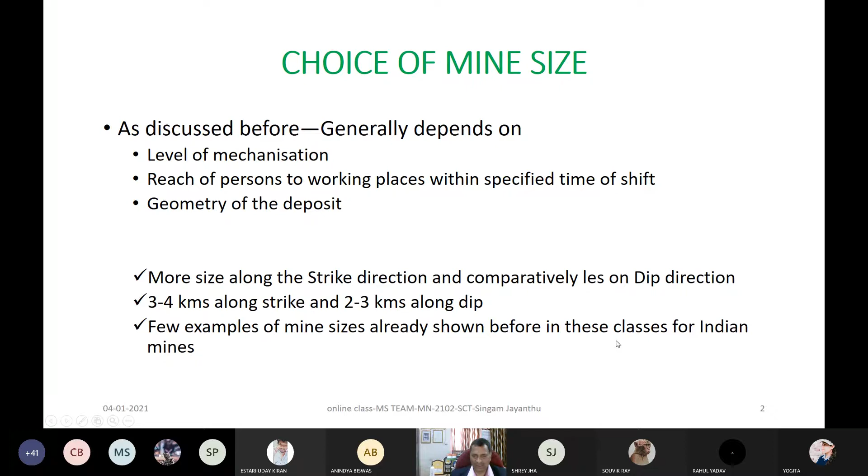Already I told you 3-4 kilometers along the strike and 2-3 kilometers along the dip. And a few examples of mine sizes were already shown before in this class. You understood it nicely. And again, I am taking you, my beloved students.

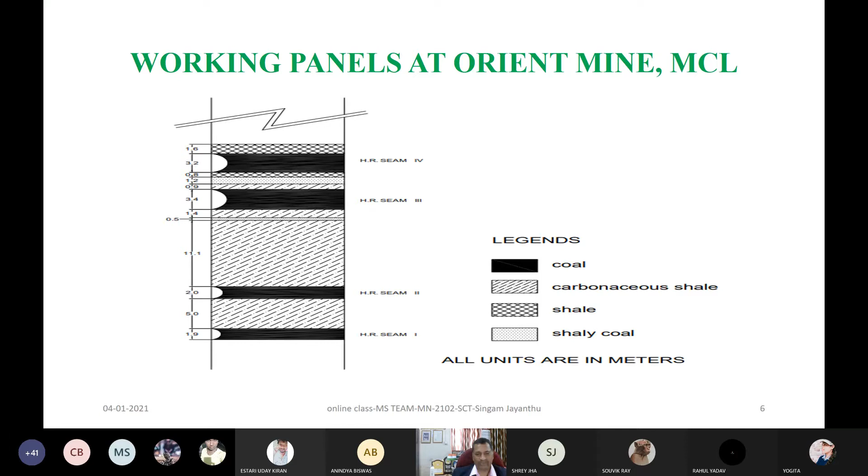It is not cost of production, it is a loss of 1000 rupees per ton in this COVID-19 period. Otherwise, even more, even less, maybe 500 rupees per ton, right? So these are the situations which, as an underground mine engineer, you should understand. And some working panel I am showing you here, with whatever LHDs they are having. Now you can see their mine condition.

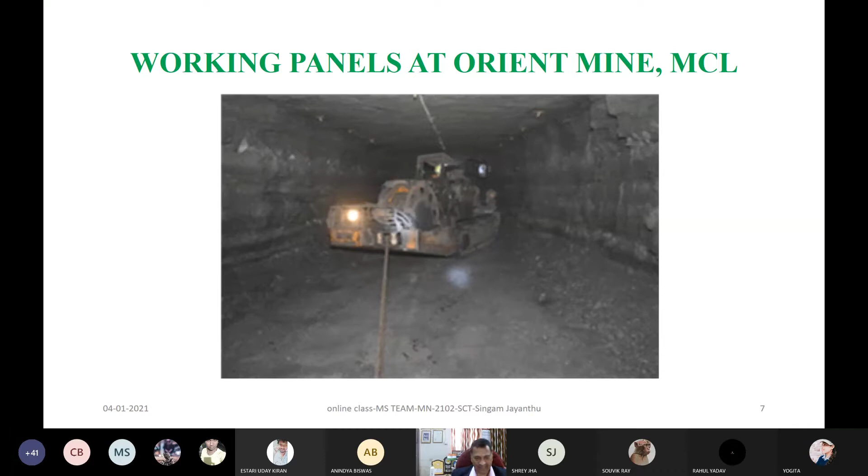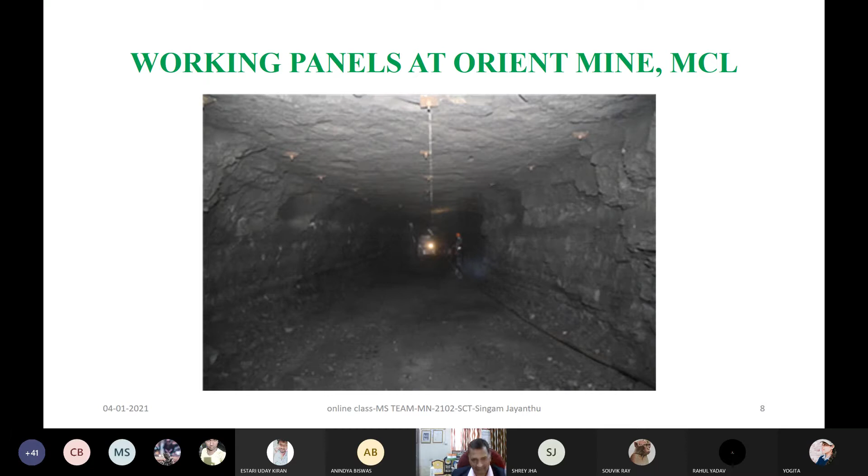This is not an old picture, just taken recently by our beloved Abhilash and others who are strata control engineers there, and our PhD scholars, MTech scholars in that mine. Now this is that mine, so that you will think that you are inside the mine, inside our mother earth, comfortably in this COVID-19 as well as your very cool winter season. You go here, it will be very hot. Feel that hotness, my beloved students. Then we will discuss more. Heated discussions we will have, so that we will understand better and make ourselves more useful for our Indian coal mining scenario.

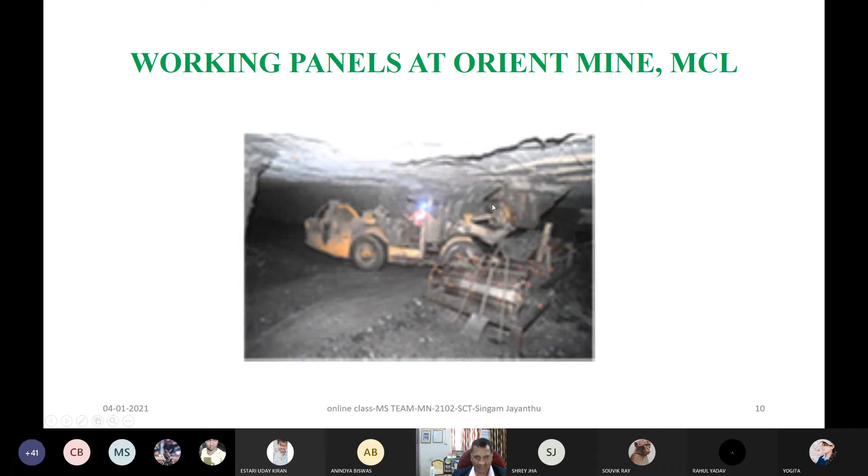Now you see how the LHD is being used there, right? And then transporting through loading onto the belt conveyors, how it is appearing, so that you feel that you are there for further discussions, my beloved students. Now this is that plan, a close view of that mine, and now you can see its total boundary, right? And you can understand by seeing this, my beloved students.

It is not a seam simply 1 in 8 or 1 in 7 throughout the deposit. It is not like that. It can be a part of a basin deposit, a basin something like this. You can understand a basin your mother used to prepare chicken biryani, vegetable biryani, whatever, right? Something like this. That is a coal seam, that part of it. So that's why sometimes you have to change the orientation to maintain the gradient of the workings. This is that mine.

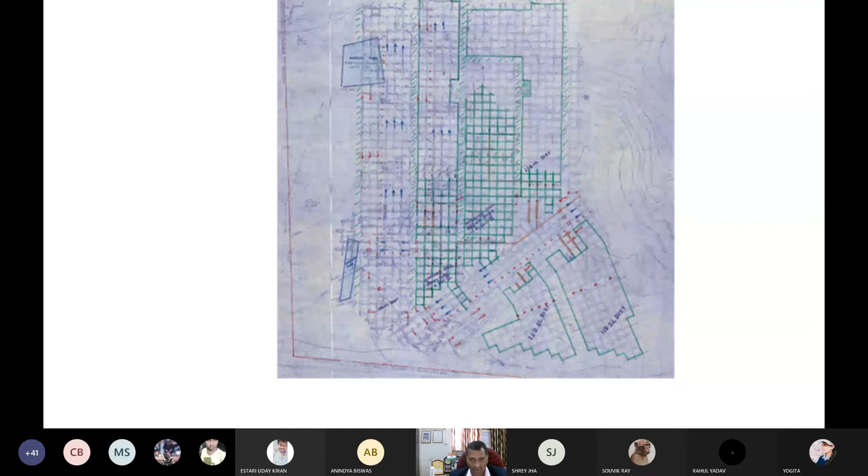Now you can see where they entered, and then development, so many things, right? Depending on the structure of that basin and other things, they decide how to develop and how to orient that mine. And this orient and that orient is different, but the mine name fortunately is also Orient mine, and you have to orient your galleries in the way that favors your mechanization or your working, right? That can be sometimes in the apparent dip, not maybe in the full dip. This is how these plans appear.

And here a very pathetic situation, my beloved students. This map is not at all digitized till now. I am very sorry to say, but you should know the fact. We are there in digital India, skill India, NEP 2020 new education policy and so many things. But still, this could not be digitized, and that is where your contribution should be.

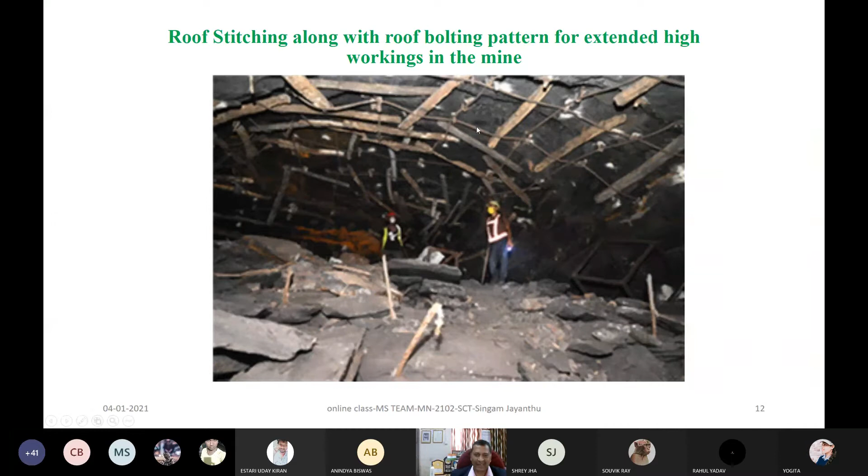And here, this is a recent photo again, where the galleries extended in the roof walls, and how it is being supported. You feel as if you are there in the roof wall area, like an assistant manager when you join, right? Either Yogita madam, Jasmine madam, you will be having the same dress, don't worry. With all masks, you are able to see. It can be a Karthik, many names I could not remember. When you summarize, when you give answers, I may refer to some more names.

Next, now you see how beautiful it is looking. So there are multiple sections. This is another section. This is a bottom section. In between there is a parting, my beloved students. There can be coal, where a thick seam is extracted in multiple sections, developed first in multiple sections. And because of some failures, there is some additional support, that's what I have written here: roof stitching along with roof bolting pattern for extended height workings in the mine, and how it is done.

You can see here, my beloved students, where this parting collapsed, where this is something like a double-decker bus, right?

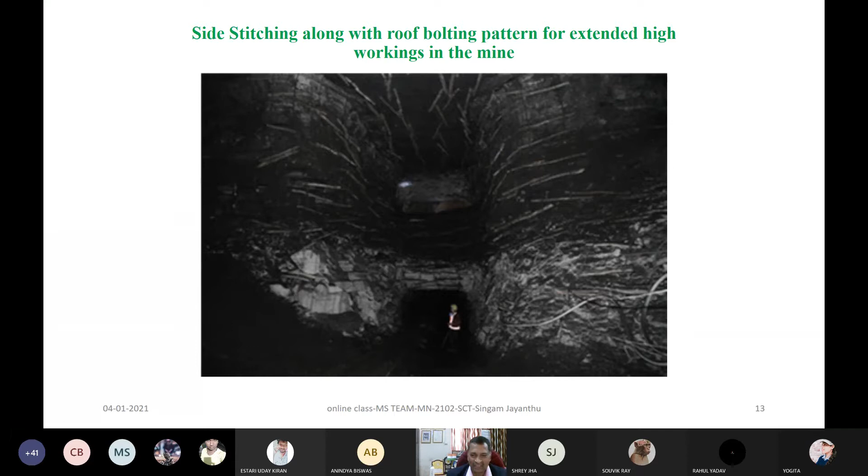Now double-deckers are coming even in Hyderabad, because I was hearing some voice of some student; for the pleasure of others, he can tell where he was talking to his mother, helping him. I like it because I used to help my mother in cutting the onions and all, and father in polishing his shoes and other things while going to his office, right, or working.

Now, details of working panels at Orient Mine. You just note down, because since I'm talking about mine size, and after mine size we are coming to selection of the method, that is important. And why I'm talking about selection of the method here is, now we have to change the method of mining in this mine to make it more profitable and at least come out of the losses of the mine. And that's where our contribution as NIT Rourkela comes, being in the same state, and we are near the mines.

And my beloved students, you should remind me, I will be taking you personally after this COVID-19 period to that mine. Whatever places I have shown you in those photographs, I will take you to those places, depending again on your interest, my beloved students, right?

Yes. Acha, any queries? You can unmute and ask me if you have any queries, my beloved students. Any queries? Yes. Let me know if you have any queries. Let me take attendance once again.

Shubham, you have any query? I like his nice profile pic with a very good dog. What is his name? No, sir. No question. What is the name of this dog you are maintaining nicely? Sir, his name is Rocky. Rocky. I thought it is Ramu, but something matching, Rocky, right? RR. Because I used to have a dog in my childhood, because I came from a village area adjacent to the mines, and I visited an underground mine in my 5th class and decided to contribute something to mining. That's the background. So this dog is appearing like that, but that dog is no more. Okay, that was Ramu.

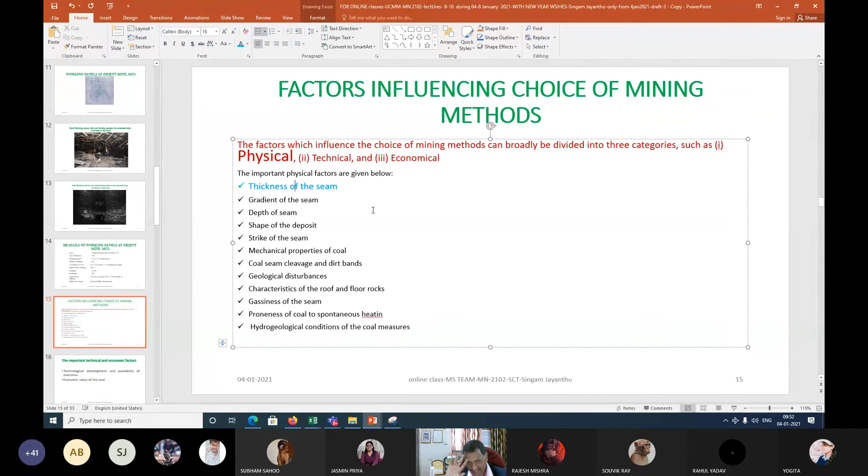They nicely said. But don't get a wrong impression that our Japanese are shorter, that's why their seam is also shorter to call a thick seam. There may be so many reasons for that. But nicely said by our Rajesh. So more than 2.2 meter thickness is called a thick seam in Japan. For us, more than 4.5, 4.8 like that. Poland, Canada different, 4.8, 3.5 in US and Australia, depending on the availability of thick seams and conventional methods.

In simple layman's language, if it is a thick seam, then we are going for blasting gallery methods. You note down the names: GDK11, GDK10, 21 incline, VK7, different mines even in Singareni. And Chora Gallery, East Katras failure cases in BCCL, ECL, where in thick seams blasting gallery is used.

Multiple seams, then integral caving, sublevel caving, or multi-seam workings with stowing. So many things we have done, right? But now gradient of the seam, like that there are different factors. Let us go with simple factors today, right? Gradient of the seam, right? So now this is also very simple because you are very much interested in pink color. Let me show it in that way.

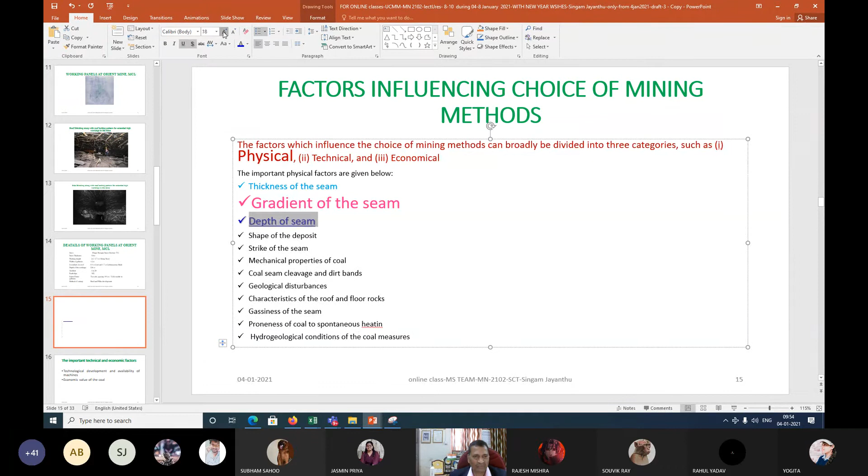Now, depth of the seam, very simple to understand, my beloved students. When depth is so much, what do you do? This is very simple and very easy to understand, right? Now, there will be a lot of load from the surface. I kept this for better understanding. This depth doesn't mean from the flat ground. It can be under the hills like this, right? There is a hill. Some place it is 500 meters, 400, and some other place a valley here, depth is only 200 meters. There can be so many things.

And even 1 kilometer, 1.5 also we went. And now choice of the method, you know very well, right? You cannot go board and pillar beyond 200 like that. Only longwall. Otherwise, some other methods.

Now, coming to the shape of the deposit, right? So now you know very well what happens if the deposit shape is not uniform. That shape can be undulating, something like a basin structure, right? And because of so much faulting, then this is thrown down, that shape itself is changed. Now I cannot even have a longwall, which requires at least 1 kilometer, 2 kilometers for a panel to design. I cannot have it. Very simple to understand, right?

Then strike of the seam, right? It is something related to shape, we can say, not much, right? It depends on along the length how much the deposit is there. Even that strike also may not be uniform. There can be so many dispositions, right?

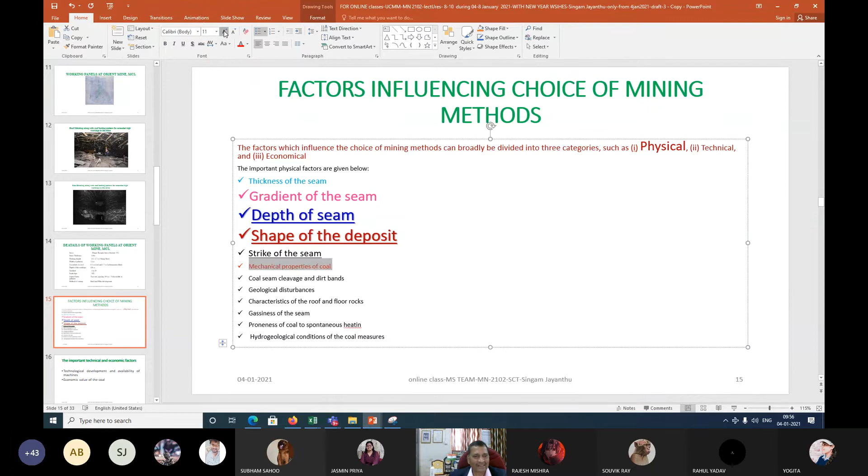Then mechanical properties, this is a very important point again, right? Mechanical properties. So now it is very simple. I cannot use even a coal cutting machine in a place where that coal is very strong, very hard. I cannot cut it. Now here you should note down, my beloved students.

This is the reason why in Gopalichuck Mine, BCCL, you note down, hydraulic mining in the 1980s, '88, '89, that time when I was like you, or five years older than you. When I was a scientist there, we were doing experimentation of this hydraulic mining in India, first time importing it from Germany. In Germany, that was a very good technology. But here it was a failure because of these mechanical properties, right? Very simple to understand, cutting machines and all.

Then coal seam cleavage, right? How is it going to help you? Definitely this helps you. If it is highly cleated, there are dirt bands inside, then how to select even that method, right? Even the location: suppose this is coal, then there are clay bands in between here at this position, maybe on the roof side, floor side, in between, then your method should be different, right?

Then geological disturbances. I hope I have already shown you some geological disturbance, my beloved students. Yes, no? I will show 2-3 minutes a little bit before ending any class. There should be some very good, beautiful pictures shown to you to improve your interest also. Have I shown you geological disturbances anytime? No, sir.

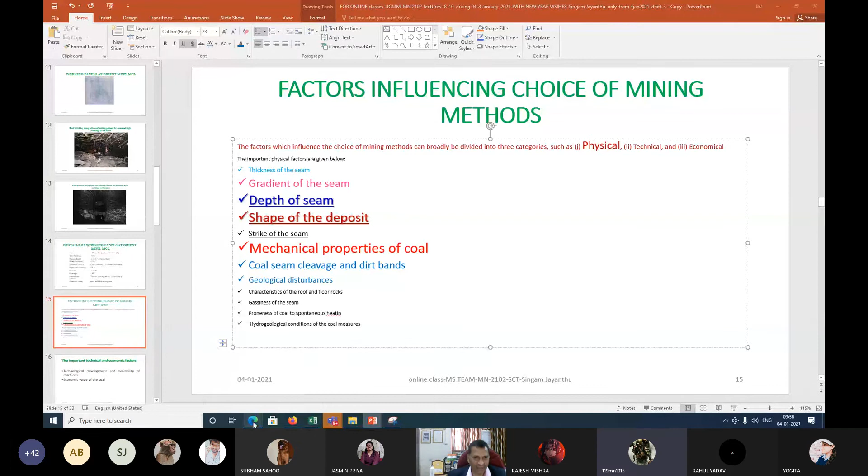Okay. Within 1 minute I will show you some typical geological disturbances. Don't worry, I don't want you to learn everything now, but I want to show you geological disturbances since this is an issue, right?

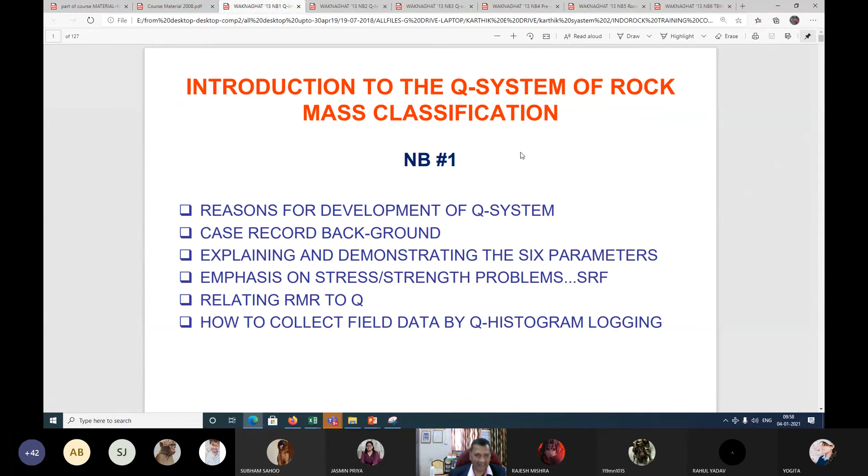Of course, this material is a part of one of my beloved friends, Dr. Nick Barton of NGI, Norwegian Geotechnical Institute, with whom we used to work. These are workshop materials where it was prepared, and some material across the desk was also prepared. And I'm just showing you some good photographs.

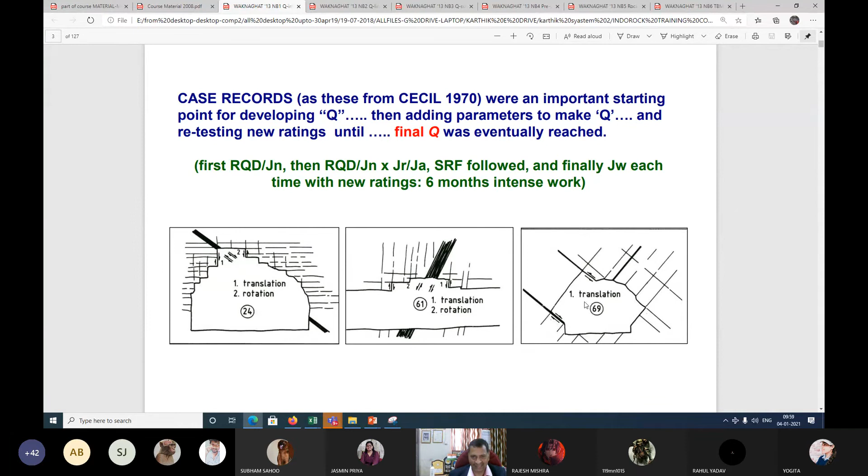Geologically disturbed means how it appears. Now you see, there can be so much disturbance with dyke, this can be a coal seam, whatever, right? And even the joints and their orientation, and that is translational. This can be transition of that joint with some other materials, right? Or it may look different. It may not be in the coal seam, but it doesn't matter. We are also supposed to know.

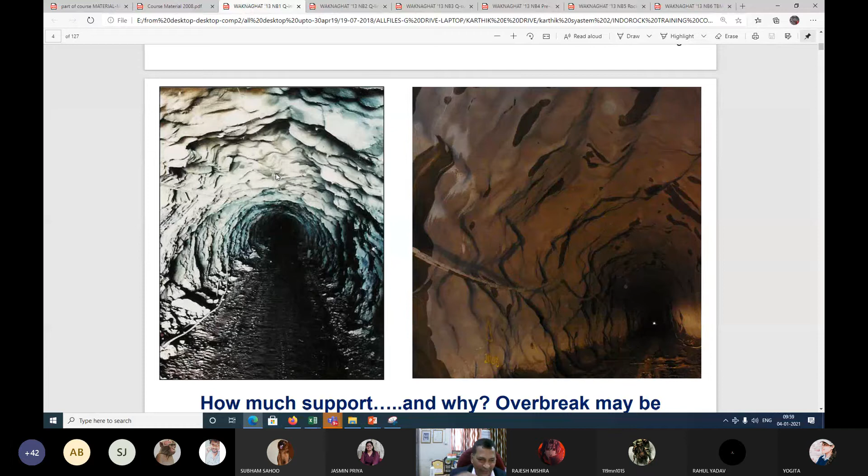This may also happen in coal seams, and specifically we are also doing tunneling to enter into the coal seam. You should know about all this, right? Just consider this as a tunnel. From the surface, you are entering into the coal seam.

You have to give me some hint when 5 minutes is left. Okay, Yogita madam.

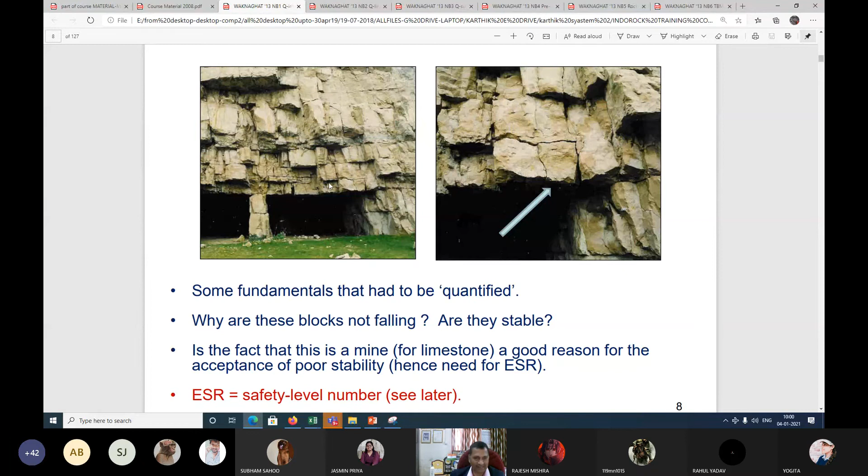So in Sweden, Norway, right? You see how geological disturbances are there. Sometimes we are still able to maintain it because of the orientation, in favorable or unfavorable condition, right? You can see how difficult situations are as far as geological disturbances are concerned, my beloved students. Now you can see here such wonderful photographs of the disturbances. Don't worry, you are not here.

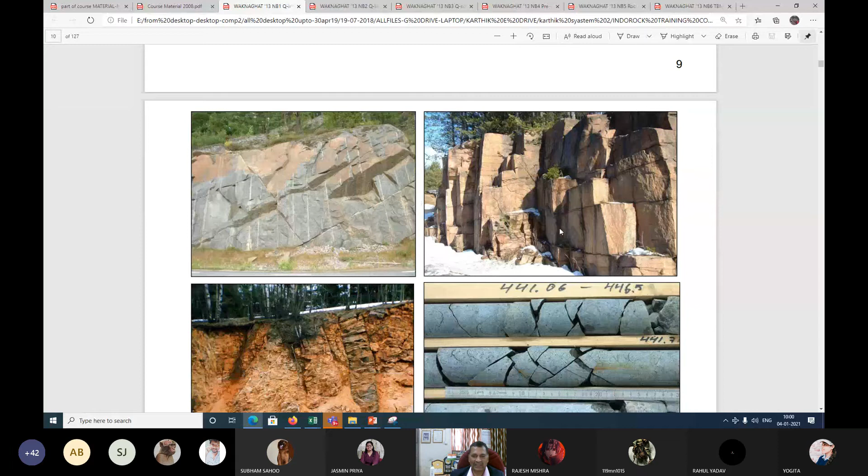These were nicely taken by our friend Nick Barton, and we were there providing some knowledge to our next generations through our Indian National Geotechnical Society conference. In a workshop, we used all these materials that I am showing to you, how geological disturbances appear in the core logs like this, and in practice, as you can see now.

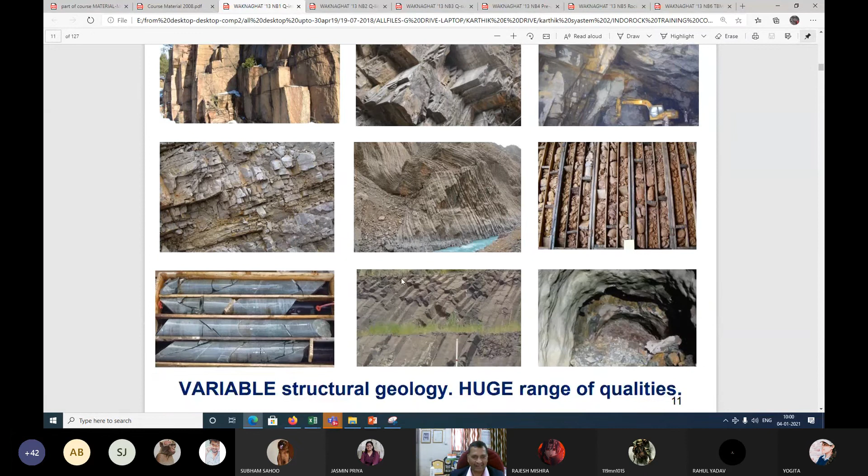These are the shear zones, my beloved students. You should understand. This happens even in our coal seams. This you should understand better. And then here are our core logs and some of this material across the table prepared by Nick Barton. We were also there while preparing this material, somewhere in 2005. All right. And I think that much is sufficient.

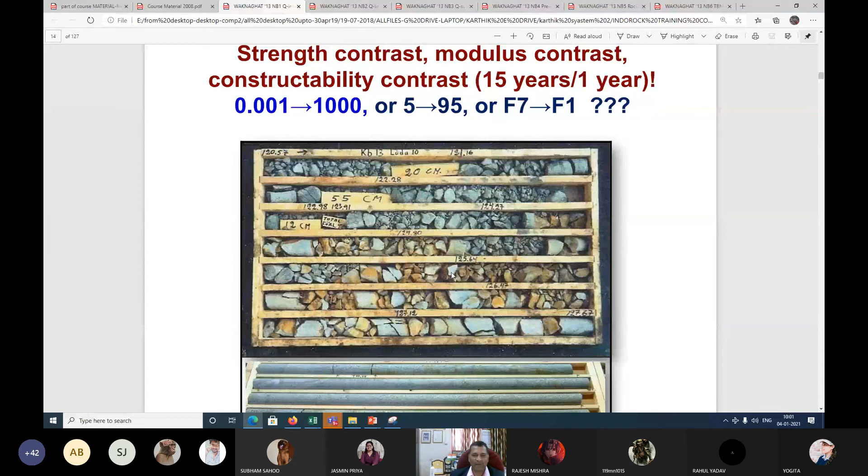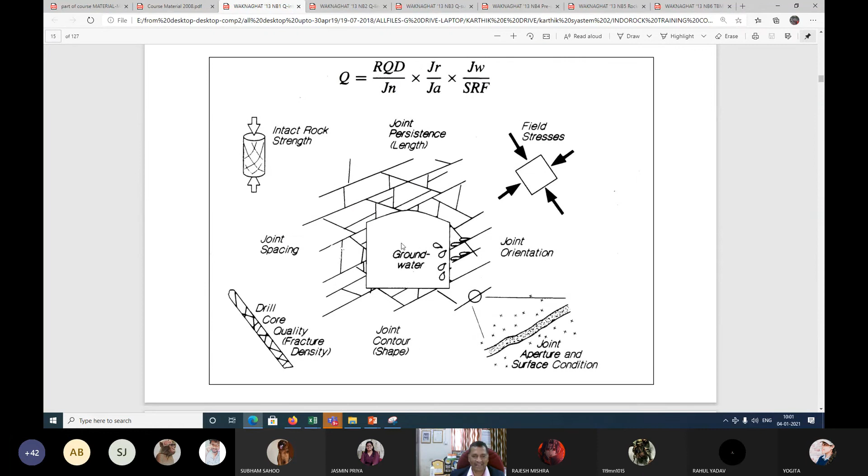You can see in borehole logs how it appears. Somewhere there was a lot of disturbance and somewhere there is no disturbance. It is highly competent rock when cores are made, right? And this can be because of groundwater, joint spacing, joint orientation, joint condition. To understand all these is rock mass quality, and you can see the situations, my beloved students.

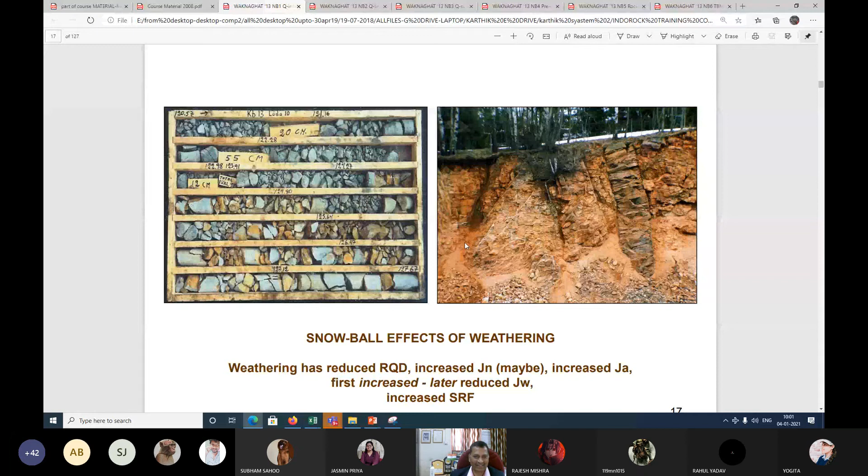Snowball effect of weathering. So many types of weathering and other things happen, and now you can see even how beautiful it is looking. This is appearing like Om Shanti. What is that? Lord Shiva. Right. Now this is appearing like, I don't know how it is appearing for you.

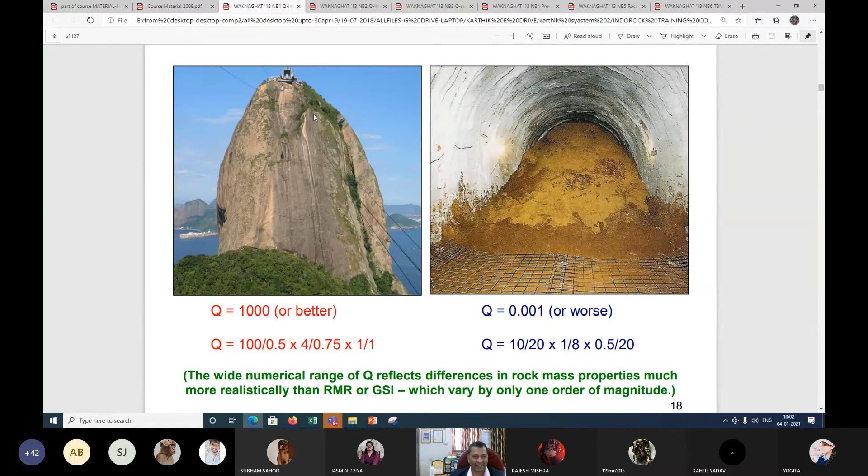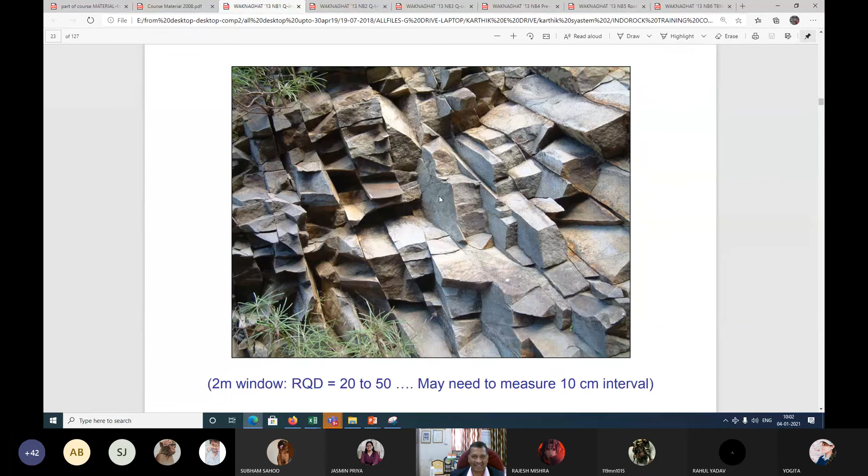In Q, 0.001 or 1000, worst situations and best situations of Q, where this can stand, where this is flowing type of rock, and this is a strong monolithic material, right? I don't want to go into that much geology now. I want to show only some beautiful photographs. Now you see how geologically disturbed, how wonderful it is. Because before closing today's class, I want to show some beautiful and sweet photographs for you.

I did it. Now let us go back to our attendance, and then any doubts. And I think our Kiran did some good work. He will explain now. And I am taking attendance once again. Any doubts? Unmute yourself, and who is ready to summarize, be ready. Sir, I will summarize. Name? Sir, Shrey. Before that, any answers for CEP questions? Who is summarizing?

Jha. Shrey. I thought Shrey is a girl. Srija, something like that. Srija is also my younger daughter's name. I thought it was a girl. Okay, no problem. Jha ji, बताइए जी अभी.

Sir, today we first started by studying the choice of mine size, which depends mainly on three factors: the level of mechanization, the proper reach of people to working places, and mainly the geometry of the deposit. Then we moved on to study the working panels at Orient Mine, MCL, and you told us about the working and mechanization there. And we studied the details of the working panels, including the seam thickness, gradient, height, width, etc.